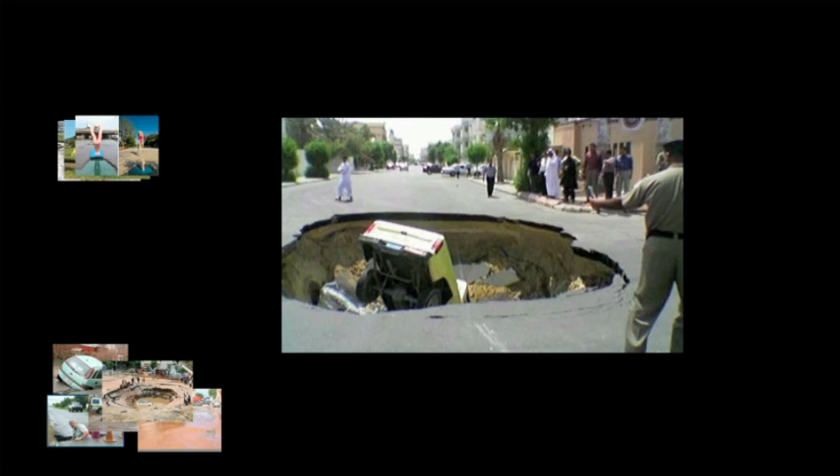I'm an engineer and geologist by profession. I've been at CSIR for 36 odd years, doing research full-time in various aspects of roads, specializing for quite a long time in unsealed or gravel roads. This moves on to low-volume paved roads and then ordinary paved roads. My interest in potholes really started with gravel roads, because once they form, it's very difficult to get out. It just carried on as I moved into paved roads. I did a PhD through the University of Pretoria on gravel road materials and performance.

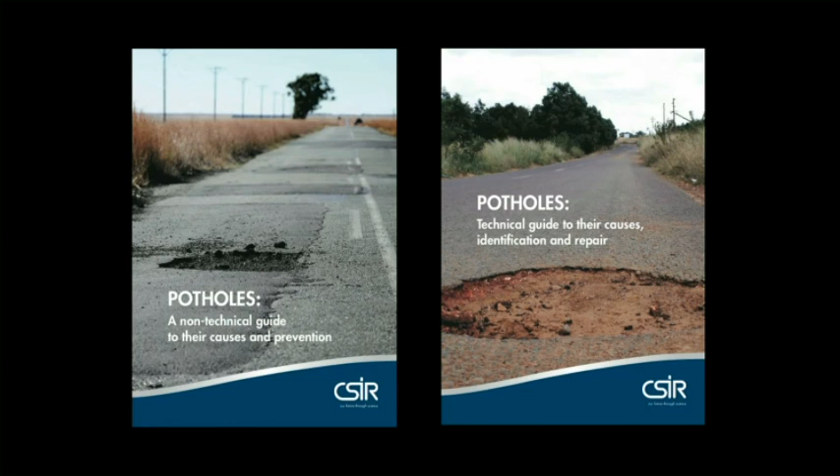Our CEO or president of CSIR turns up in Parliament a couple of times a year, and in the early stages, end of 2009, early 2010, each time he went to Parliament, everybody said, what is the CSIR doing about potholes? Essentially, we don't fix potholes, that's not our job. We do research and some initial training and then hand it over to people like the South African Road Federation to carry on the training. But the message came back that this was a worry to government, and so we decided to do this project to put together the information we gained over the years into a document which would hopefully help reduce the pothole problem.

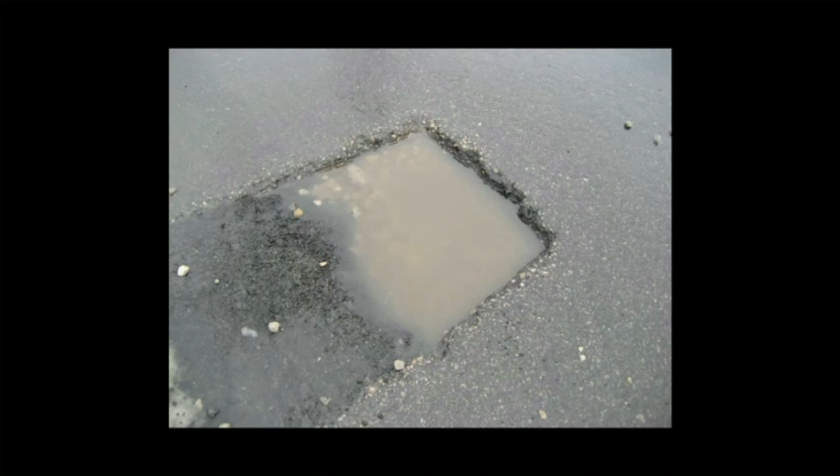I think it was a pretty wet summer season we had up here in the Highveld. And as we'll probably talk about shortly, water and roads don't combine under traffic. So with the excessive rainfall, fairly extended periods of fairly heavy rainfall, the roads started deteriorating. Potholes increased far more than in previous years, and basically the repairs couldn't keep up with them. So they became this visible, high-profile problem countrywide.

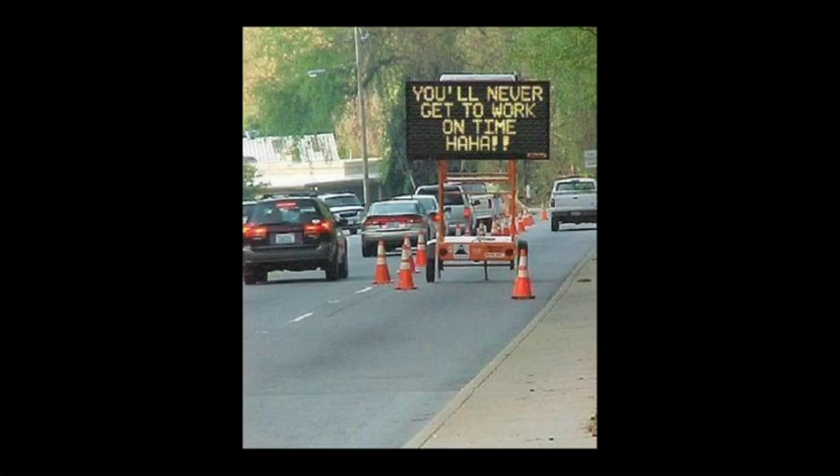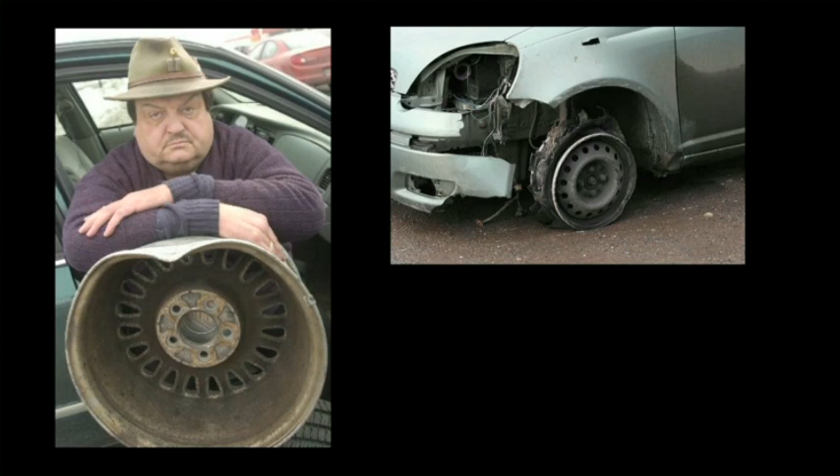Up until 2009, there had been a couple of fairly high-profile claims against road authorities for potholes, damage to vehicles, accidents on bicycles, for instance, things like that. But it was a fairly lengthy court procedure to go through. I think in 2009, 2010, where the damage was more tires, rims, some minor vehicle damage, people realized they could claim from municipalities and road authorities, and the claims started coming in. But apparently the authorities were suddenly saddled with all these claims, and they admitted responsibility in many cases and didn't even argue, paid up.

Not at all. We've seen in literature that the UK, Australia, over the last couple of years have also experienced extensive development of potholes, and in monetary terms far more than we actually need to put in to repair them. So it's not unique, but it's a legacy of cutting back in funding over the years in terms of preventative maintenance. If you Google potholes, you get quite a few million hits immediately, but they tend to be predominantly from America and Europe. And the origin or cause of potholes in those environments is somewhat different to ours.

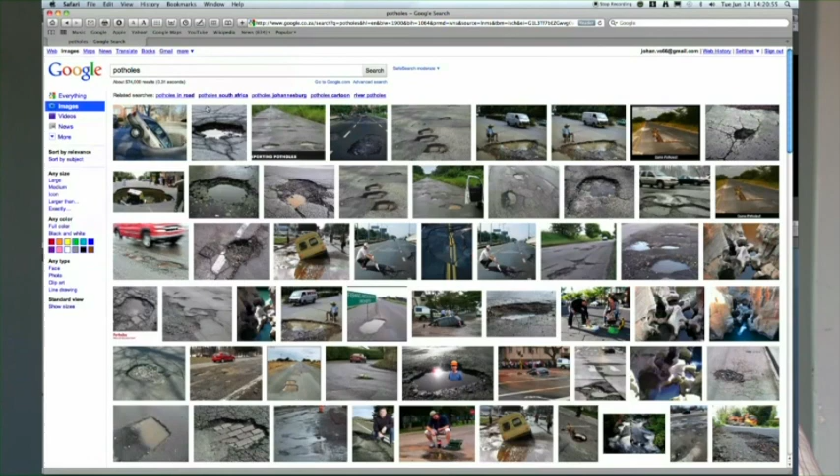There, where you have the so-called spring thaw at the end of winter, when the frozen water in the road starts thawing out, it affects the road, softens the material, weakens it, and heavy loads on that type of material lead to potholes. That's not the kind of pothole we get in South Africa. The whole road network, right from the early 40s, 50s when they started paving it, uses much thinner asphalt and thin chip seals, or spray seals as they're called. In Europe, it's not uncommon to have 100, 150 millimeters of asphalt surfacing on a road. Here, the maximum would typically be about 50, often 25 to 40. So our pavement structure is very different, primarily because of the drier, warmer environment. We haven't got the cold conditions in winter.

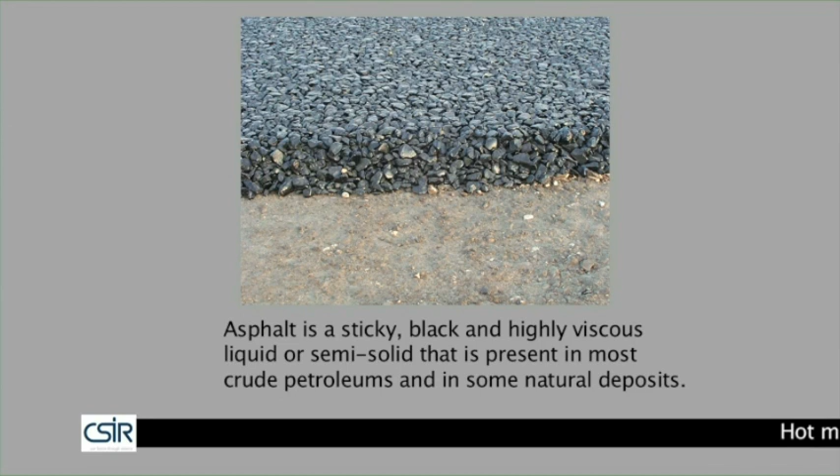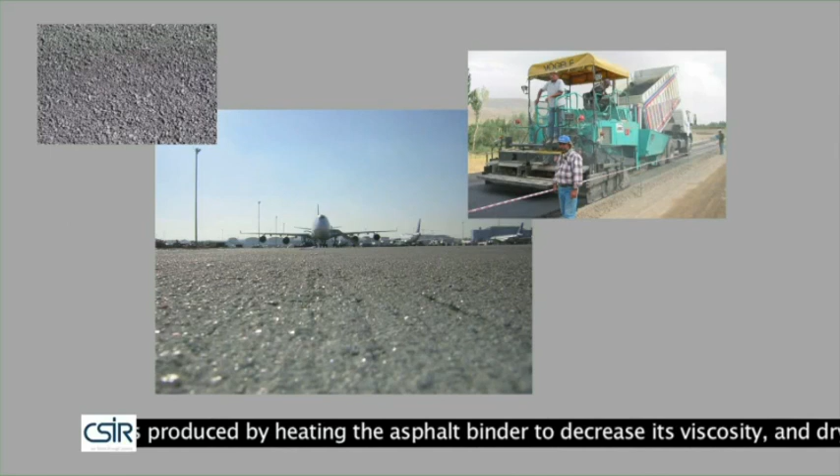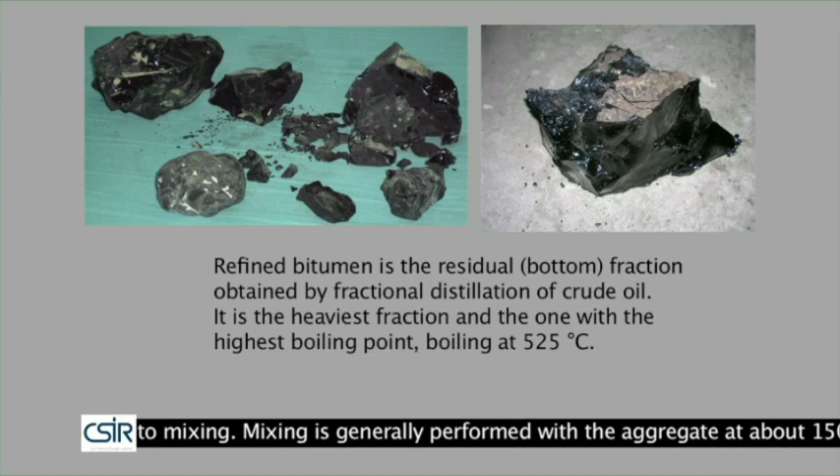Asphalt roads are roads that are paved with a mixture of stone and bitumen, and there can be two kinds. It can be asphalt, which is made in a hot mix plant at high temperatures, placed in the road at high temperatures, a combination of usually aggregate, sand, bitumen, and some cement or lime or something. The other kind of paved road we get is the thin bituminous surfacing, where you spray a layer of bitumen on the road, put stone on that, roll it in, and that's basically it. Sometimes you can have two different size stones to make the seal.

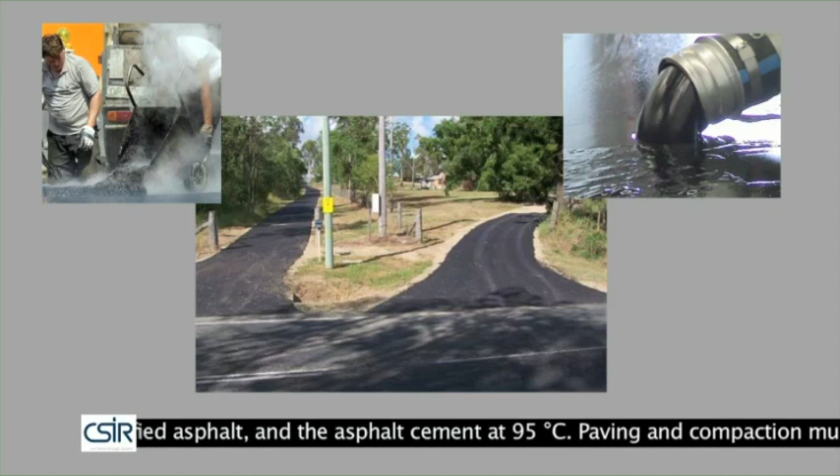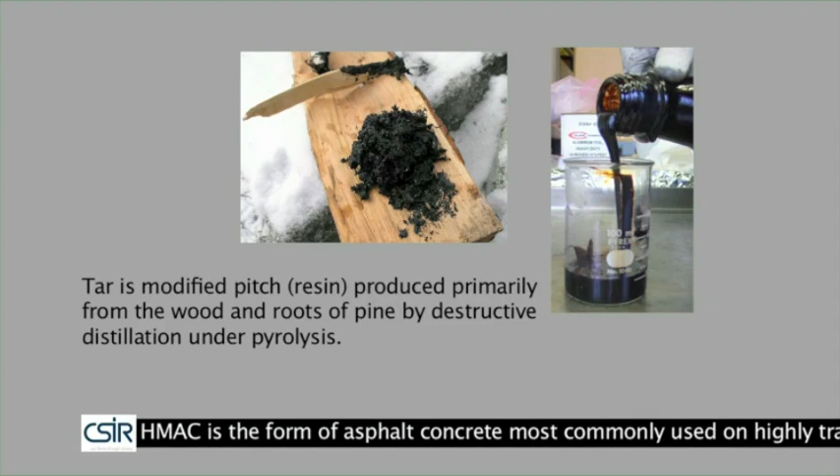Tar we don't use anymore, it's basically banned for use on roads in South Africa. It is carcinogenic, it's derived from coal, whereas bitumen is derived from oil. That's the main difference. And then concrete roads - in South Africa we've probably got maybe 4 or 5% maximum of concrete roads, and a totally different process, which is cement, aggregate, and sand mixed together.

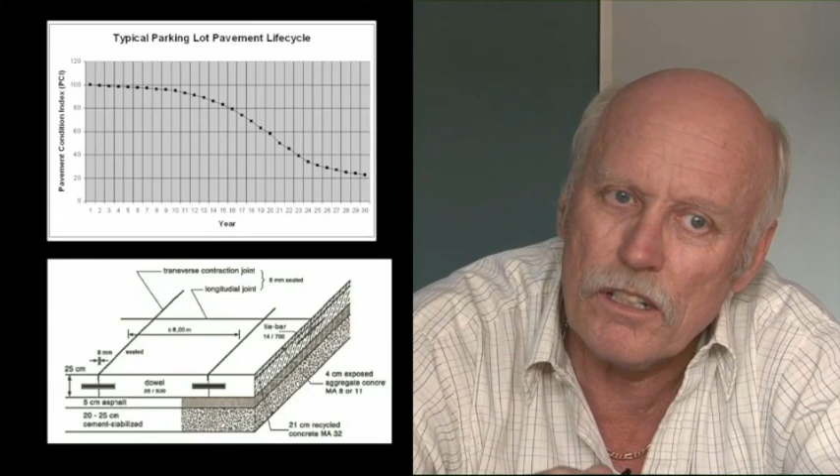A good asphalt road is designed to last probably 12 or 15 years with minimal maintenance. If the pavement layers are correctly selected, the materials, the pavement balance is right, the asphalt is right, and everything's constructed properly, they should last at least 12 to 15 years without any maintenance.

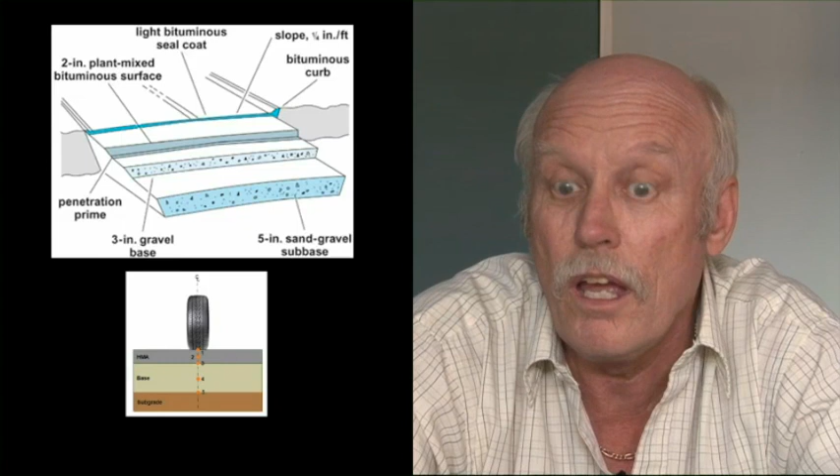If they're not maintained, the asphalt starts drying out and shrinking. It goes from the darker blackish color to gray, and it becomes stiffer as the bitumen volatiles evaporate. It gets stiffer, which allows it to deflect more under traffic, and it generates fatigue cracking just from this repeated bending up and down under traffic. That's the cause of cracking in an asphalt road, which ultimately leads to potholes when water gets into the cracks.

There's a whole lot of different ways that cracking forms in asphalt. Obviously, one is if you've got poor drainage. Next to the road you get ponding of water. It could be from irrigation, seepage from a stream or dam, or even often in informal settlements, just the general drainage ends up seeping into areas next to the road.

If that water lies there, it can soak into the road, the structural layers beneath the asphalt, and weaken those layers, so your deflection under traffic is even higher, and the fatigue cracking is quicker. It's really like bending a wire backwards and forwards — your bent wire gets hotter and hotter, and eventually it'll break. That's what happens to a road.

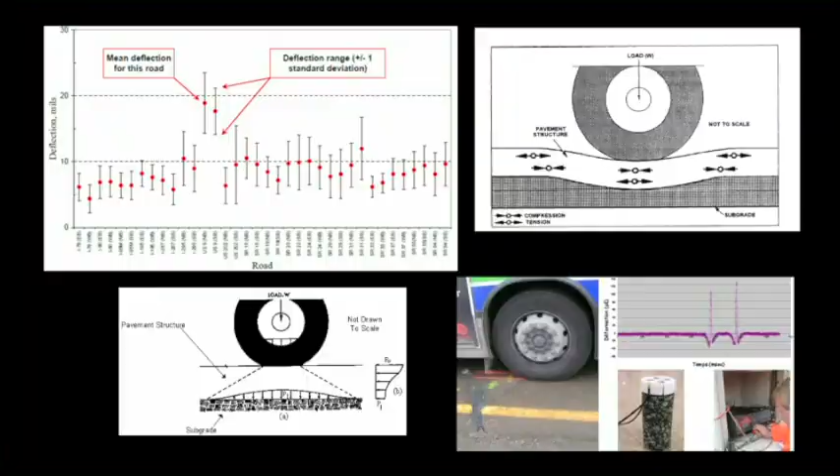Under every vehicle there's some kind of vertical movement. A really good strong road may deflect 0.2 or 0.3 millimeters. Other roads may be 0.8, 1 millimeter. We've measured even 2.5 millimeters in some very light pavement structures. Obviously, as a vehicle goes across, the effect of that movement on the bitumen or the asphalt is exactly like the effect on a wire, and ultimately it will crack.

Aging affects bitumen, as I mentioned earlier. The bitumen is placed hot — it's refined and made at the factory, delivered to site at anything 130 degrees upwards, sprayed on the road, and it cools down. Immediately it starts oxidizing just from the oxygen in the air and the ultraviolet light. It starts aging, losing the volatiles which keep it flexible — a lot of the chemical compounds actually evaporate with time. This causes stiffening of the bitumen, whether in a thin bituminous seal or an asphalt, which makes it more prone to fatigue.

When we don't have particularly good materials for the pavement structure, it's not uncommon to get a material that you can improve by the addition of cement or lime — that's what we call stabilization. You can make a weak material almost into a weak concrete, which is much stronger than we need in a road in many cases. When we add the stabilizer, be it lime or cement or a whole lot of other things, it absorbs water from the layer to hydrate it and causes formation of cementitious products, which causes shrinkage of the layer, which causes cracking. Frequently driving on a road, you'll see this typical block cracking.

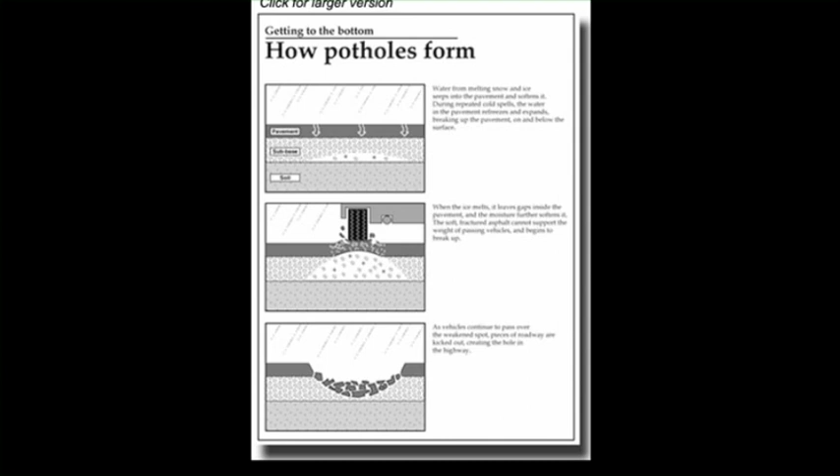If those cracks aren't sealed, the water can get in. What we do know is that those cracks, even in the subbase, which is one of the support layers — above the subbase you'll have a base course, which could be a G1 very good stone base, and then your surfacing — those cracks can actually reflect right through the G1 and through the asphalt or any other surfacing and appear at the surface. That's when they need to be sealed with a special bitumen rubber or something to stop water getting in. If water gets in, it runs through the crack, through the base, through the subbase into the subgrade, and you're back with a weak support layer.

This is a big problem: traffic. Over the years, from 10, 15, 20 years ago, we had sort of 2 or 3-axle trucks. Now we've got literally hundreds of these 7-axle interlink trucks. The ones travelling on the main roads, the weight is controlled pretty well, so they tend not to be overloaded. But the ones on the back roads and less important roads, where there's no overloading control, tend to be overloaded, and the effect of an overloaded axle is extremely detrimental to roads.

The damage is a little formula: the weight of the axle over 80 kilonewtons, which is our standard legal axle load limit, to the power 4.2. So any overload is increased to the power 4.2, which has an enormous effect on the way the road handles that load.

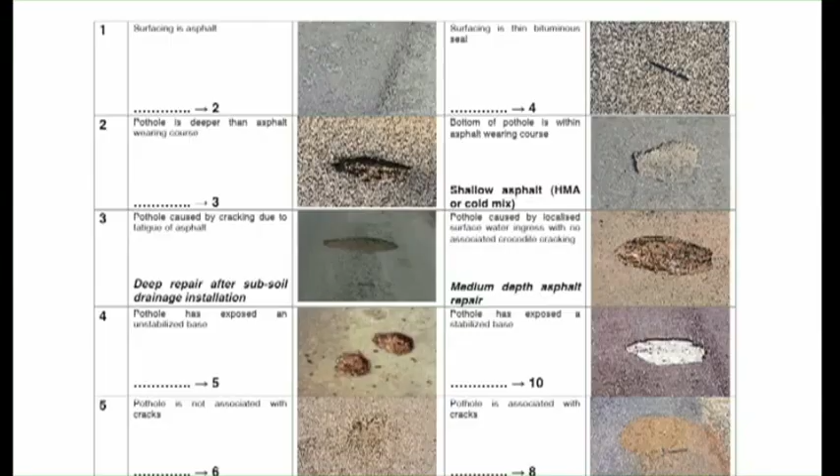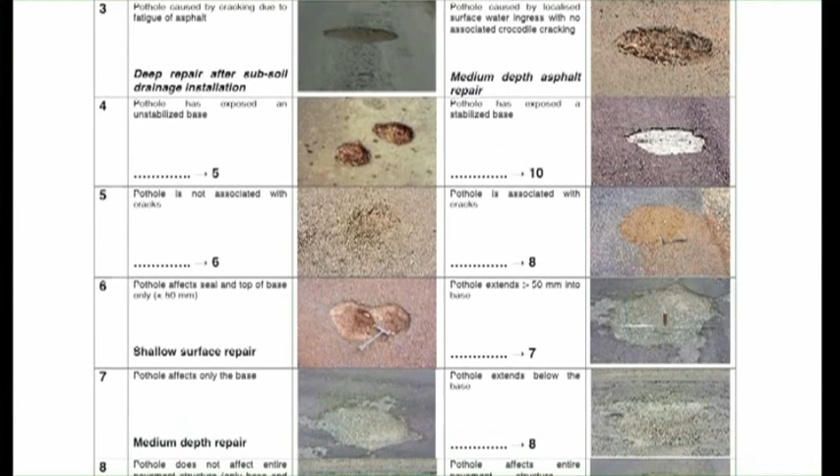When we were doing this document, we noticed there were different kinds of potholes in asphalt and thin bituminous surfacings. The thin bituminous surfacings in South Africa probably make up 95% of the bitumen paved road network. Apart from the main metropolitan areas and the national highways, the N1s, and even not all of the N1, but most of it, those are paved with asphalt.

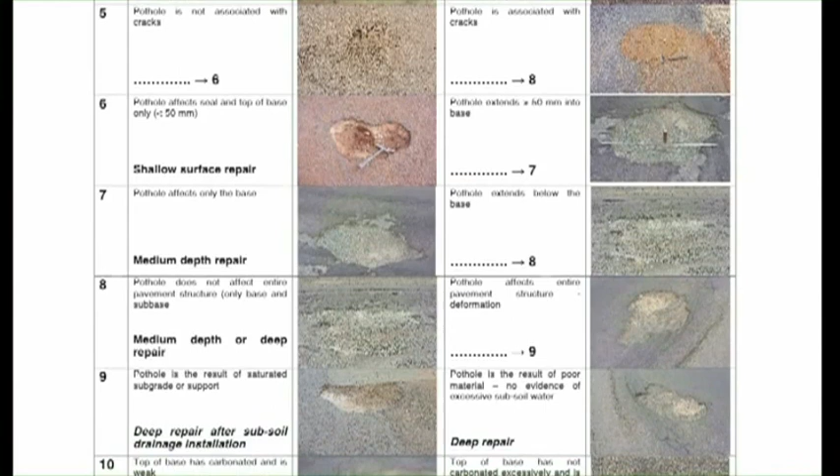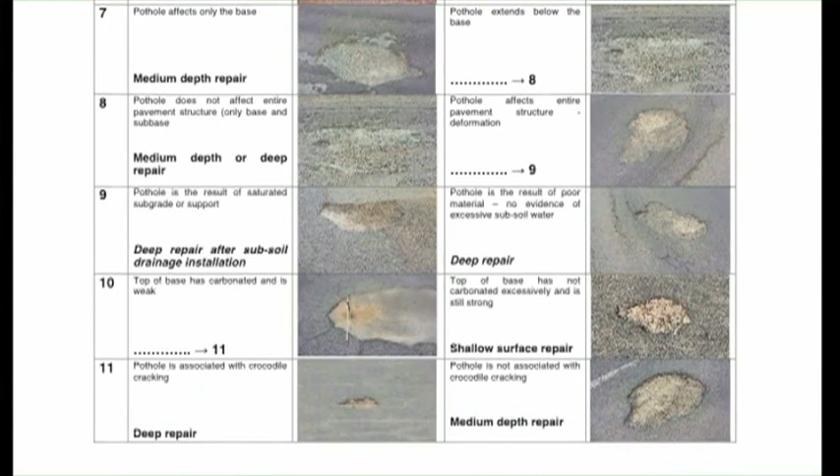Everything else in this country is paved with what we call thin bituminous surfacing. And these vary from 5 millimeters, for a sand seal, up to probably 17, 20 millimeters for a double chip seal with a slurry on top or something like that. So they do differ in the way they fail and perform from an asphalt.

A typical thin seal, a single seal, should last 7 or 8 years before it needs some kind of maintenance. A double cape seal, which is a seal plus a slurry seal, should last 10, 12 years, compared to an asphalt, which is probably looking at 12 or 15 years. So they need more maintenance.

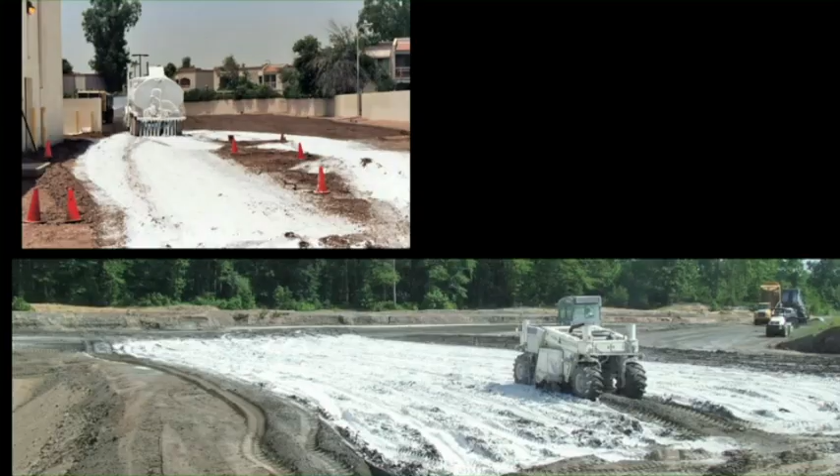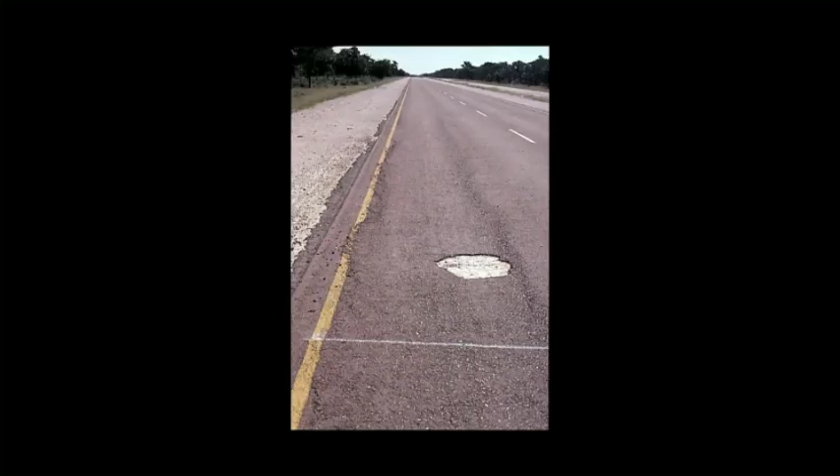As mentioned, often the top of a stabilized layer becomes weak. Essentially, cement or lime, which you use for stabilization, are made by burning limestone, which is calcium carbonate, generating carbon dioxide, and you're left with a calcium oxide or hydroxide, which is a stabilizing material. That is naturally unstable at the current ambient environmental conditions and wants to absorb the carbon dioxide back into it and go back to the limestone.

So during construction, one has to be very careful that this process doesn't take place too quickly. And what we do find in many cases is that the top layer does carbonate, and so you get this weak laminated layer on top.

Again, there are ways of overcoming it through the construction process. It can be skimmed off with a grader before sealing, that type of thing. So there are ways of handling it. It's not a major problem, but if it's not seen in time and handled, you can get this lamination or thin layer beneath the seal, which is prone to crushing under wheel loads. Even the sealing process alone, just rolling the chip into the top of the base, can break it up. So it can be a problem, and it will lead to potholes.

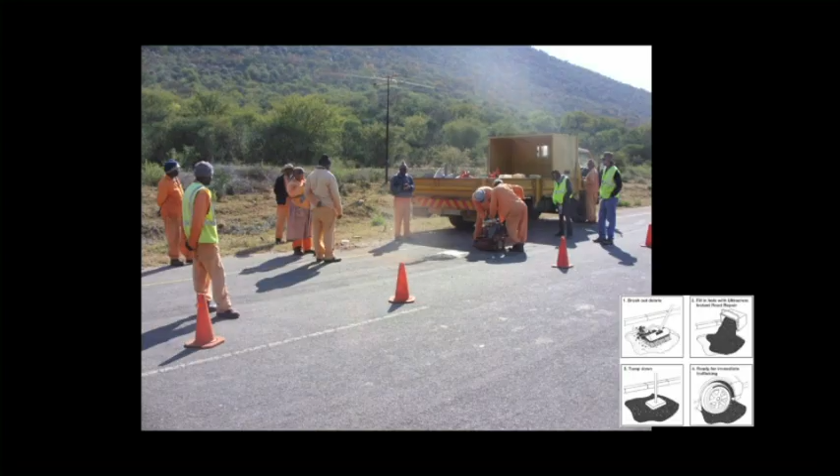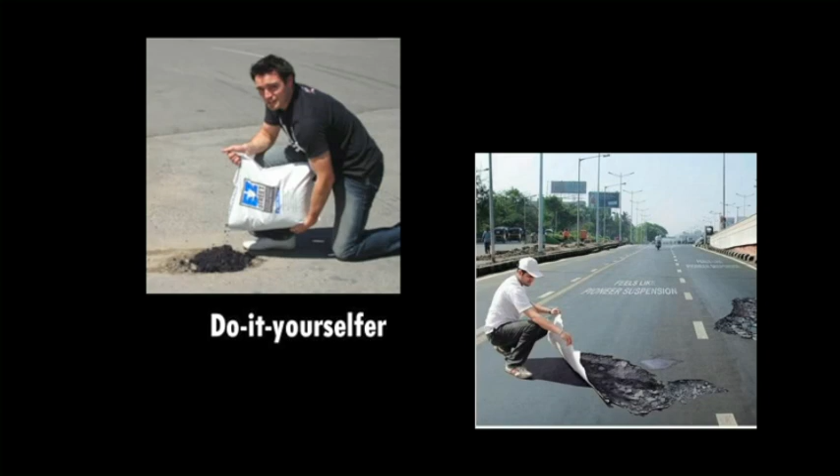This is one of our biggest problems, where potholes are seen, teams go out and patch them, but they're not actually treating the cause. All they're doing is superficially fixing the pothole. If the cause is not attacked and solved, then the problem is going to form again. And this is probably the biggest thing that worries the communities and the public, as they see the pothole repair teams over and over at the same potholes, patching them over and over again.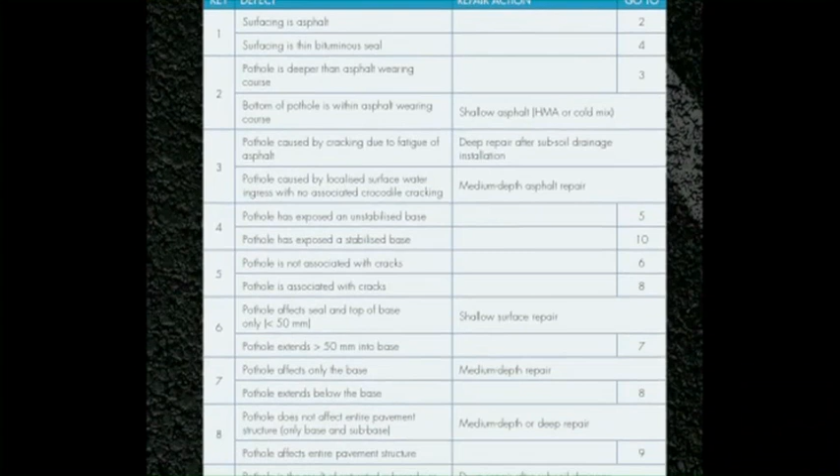One of the main objectives of this guideline is to identify the causes so that when the pothole is repaired, it's repaired properly and we don't have to keep going back over and over. It costs a lot of money, takes a lot of resources, wastes a lot of materials. A lot of potholes are not done properly, they won't last.

But there are other areas as well. It's not just these. Obviously, if there's water as the problem, you need to stop that water. And that often entails the installation of subsurface drains to cut off the water before it gets into the road.

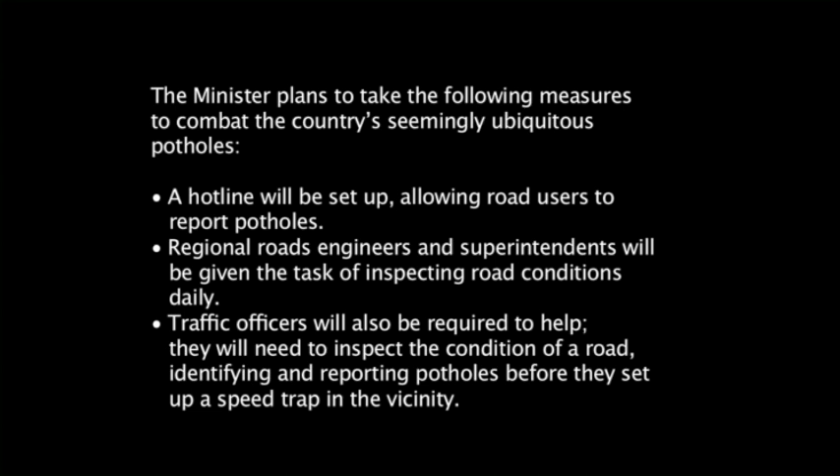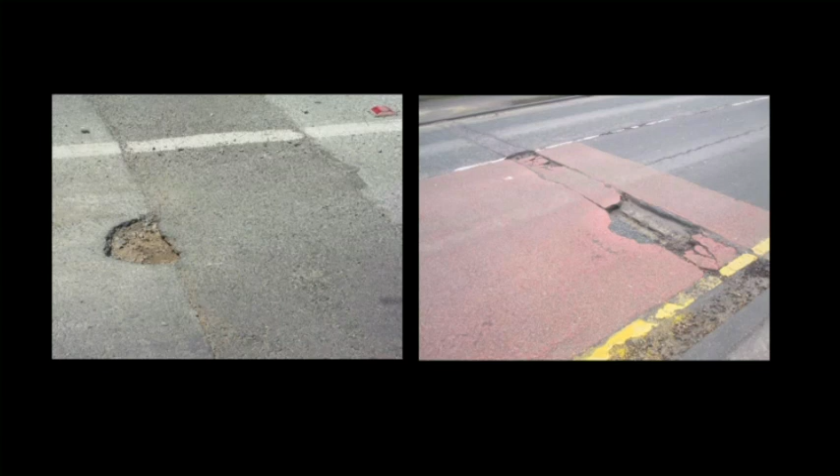We get other areas where trench reinstatements, municipal roads particularly, where a service provider will dig a trench across the road to put in pipes or wires or whatever. They're not normally backfilled and constructed to the same standard as the road, so you get some depression, the trench collapses a little bit, water ponds in that, soaks in, softens the road, and the trench fails. You frequently see potholes along the side of trenches where the join between the trench and the old road is not sealed properly, and water goes in there.

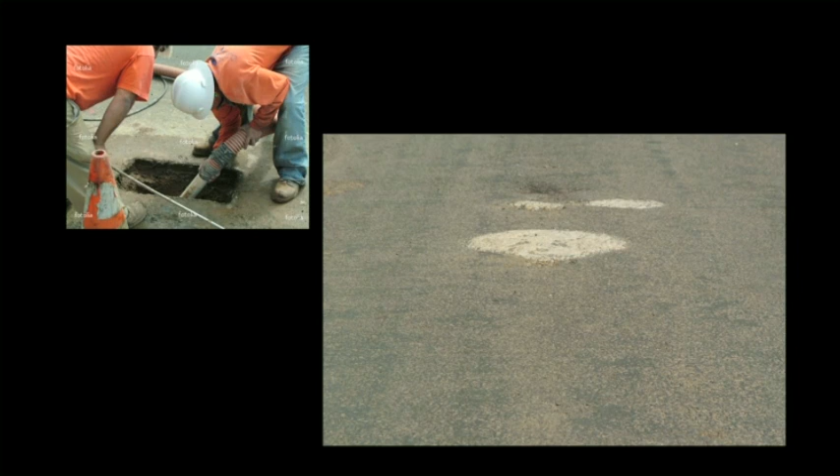So there are all these areas. Another big problem is people putting in a heavily stabilized material, almost a concrete, just by mixing some soil or aggregate with cement, far too much. We shouldn't use more than about 3%. You end up with essentially a concrete block in the road. This is going to behave differently under traffic. It's going to rock, it's not going to deflect to the same extent as the traffic, so there's going to be movement at the edges. When it starts opening, cracking around this block, water gets in and problems start again.

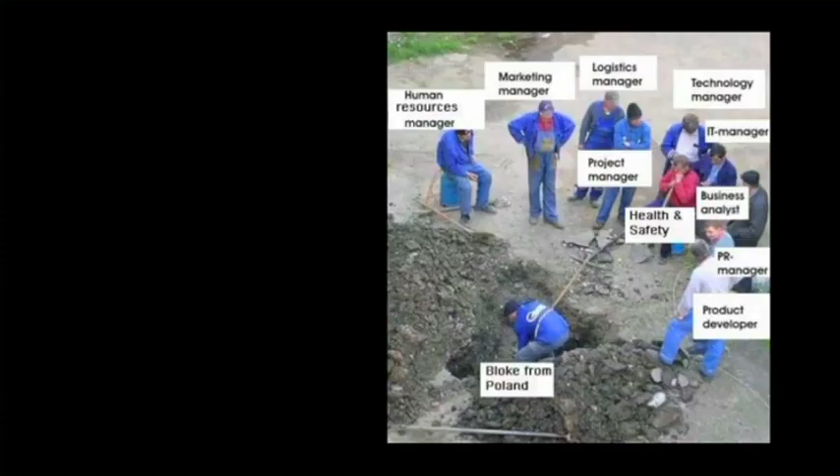So there are a whole lot of areas of repair that, if not carefully controlled, will just lead to bigger problems. The Department of Public Works is trying to increase the number of labourers on pothole repair jobs to create jobs. It's a massive opportunity to create lots of jobs.

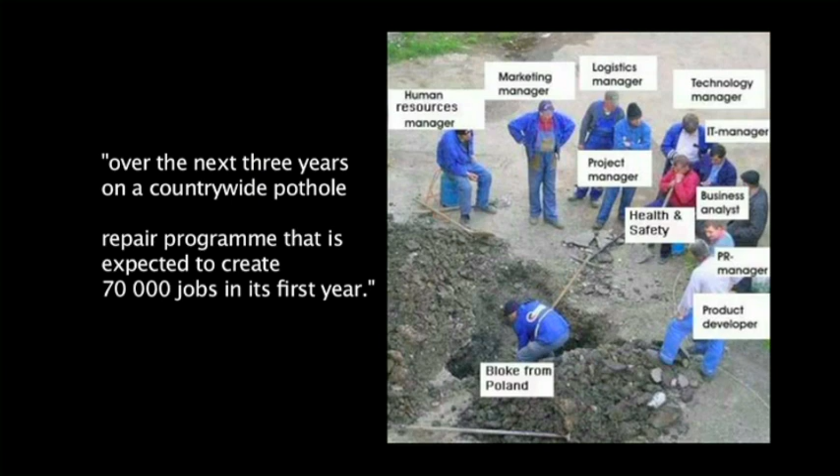They're looking this year at creating something like 70,000 jobs. A typical pothole repair team would be anything from 10 to 15 people doing different parts of it, compacting, digging, putting in the asphalt, whatever. There are a number of mechanical devices, machines, whatever you want to call them, that go around with 2, maybe 3 people and literally repair a pothole on site. It does not create a lot of jobs, but it's quick.

You can probably repair a lot more potholes in the same time, but it does not necessarily solve the underlying problem. You're just filling in a hole. It's like putting a plaster over a problem. You're not curing the septic wound underneath it.

Right, there are a few basic rules. In the guideline document we've highlighted, there's a chapter on repair of potholes, and depending on the cause, there'll be different kinds of repair. The preliminary treatment is really the same for all of them: you identify the pothole and mark out the area to be fixed. It should not just be the pothole, because water has weakened the area around it, and there's probably cracking associated with it. So it needs to be much bigger than the pothole, and it needs to be marked out.

Then one comes on site, you open it up, clean it, cut it out - typically we're recommending a diamond saw, but teams can do equally good jobs with picks. Sometimes you need jackhammers if it's a stabilized layer. You need to clean it out, get all the loose material out, get to where you've got the original unaffected road pavement, and then start doing the repair. So the preliminary work is actually probably the most important part of it.

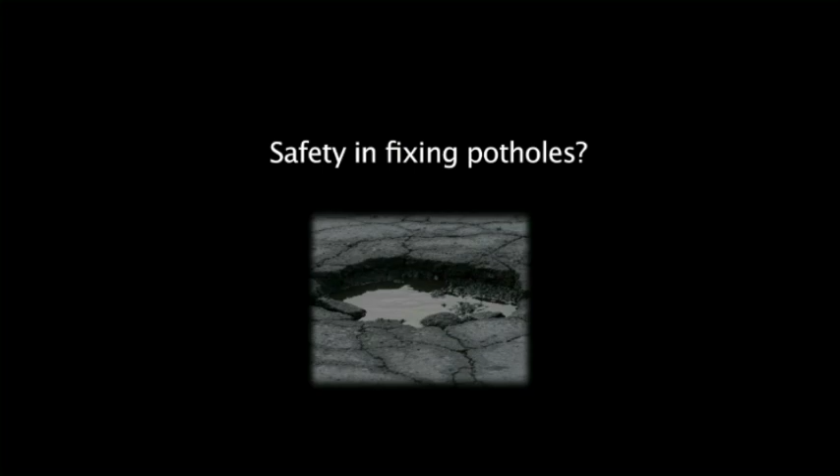Any road project obviously has serious safety implications - people working on the road, fast cars, big trucks. We've, in the document again, highlighted some aspects. It's not really a safety document; there's lots of other documents on that, standard procedures.

But there are things we've seen on a lot of pothole sites where the cones are so black from bitumen and stuff you can hardly see them, and the safety jackets are dirty and don't show up properly. So we're highlighting a few basic things, like your flagman should be properly trained, the signboards should be clean, and the right boards - you often see the wrong boards. Basically we're just highlighting a couple of things, but that aspect would normally be under pretty good control of the contractor anyway.

Typically the pothole would be filled with different layers, and then the top layer would be a cold mix or hot mix asphalt. We can talk about that shortly.

It's not unusual for potholes up to 100, 200 millimeters deep even, to clean them out and just fill them with hot mix asphalt, but it's expensive. It's far more cost effective to actually put a layer of gravel or stabilized layer or treated material in first and just use the asphalt for the top 50 to 75 millimeters.

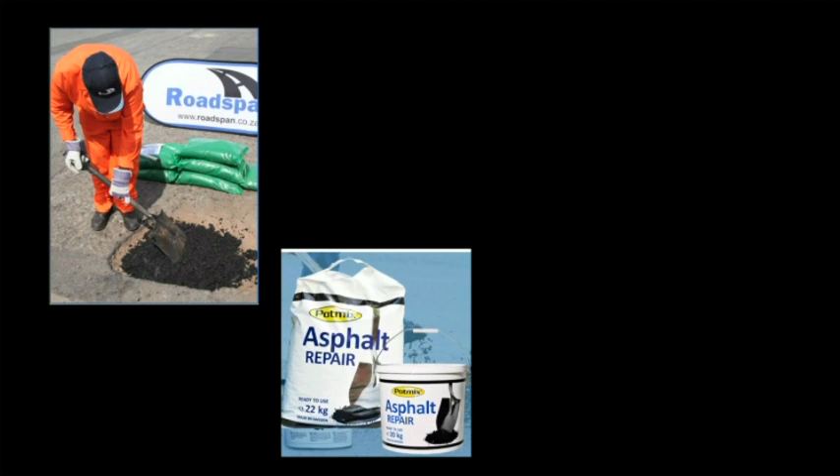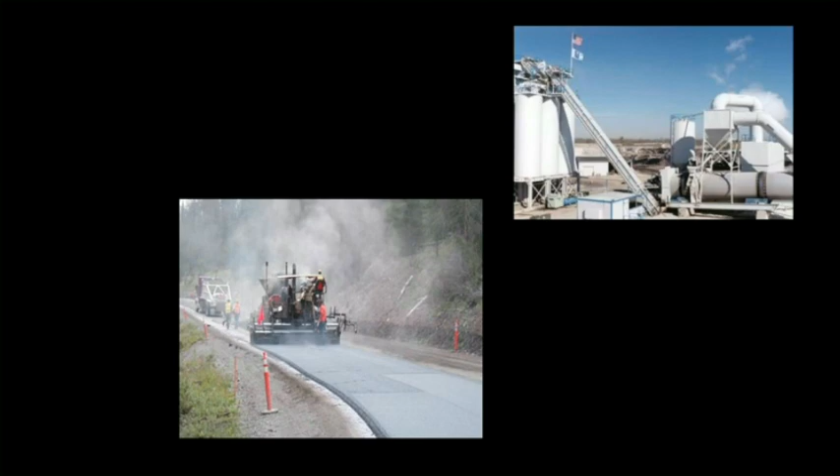We get two kinds of asphalt - a cold mix, which comes in bags, which you can use particularly well in rural areas. In urban areas, if you've got a hot mix plant, then it's probably more cost effective. A lot of the metros have their own plants, they can make it. The disadvantage is it's delivered in quite big quantities, and it has to be constructed, put in the hole, compacted before the temperature drops below - depending on the mix - but around about 135 degrees normally.

After that, it's difficult to compact. You don't get the density, it remains permeable. So in urban areas, they tend to look at hot mix asphalt. In rural areas, there's no way you can actually deliver a truck of half a cubic meter to one pothole somewhere, so cold mix is much better. It comes in bags - open the bag, put in a hole and just compact it.

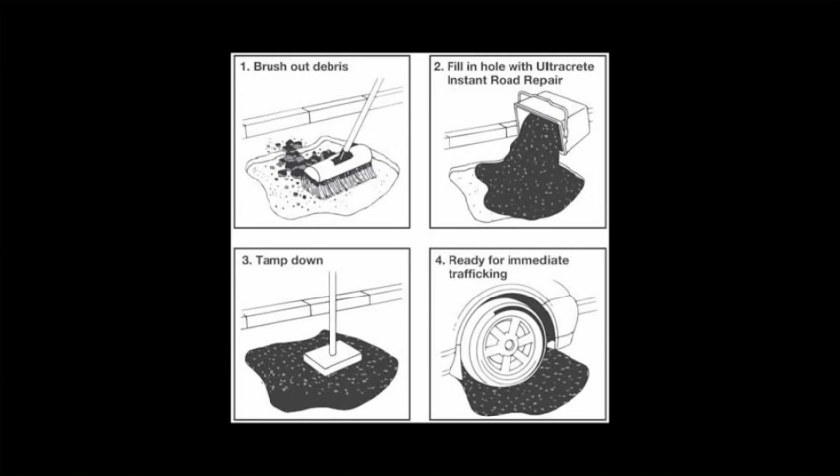The worst thing you can do, and we see this commonly, is to fill a pothole with material from the side of the road. It's often done as a temporary measure until they come and repair the pothole properly. But this usually happens when a pothole gets to a significant depth - otherwise, don't worry to patch it. Once vehicles start feeling it, probably 100 to 150 millimeters deep, people will take material from the side of the road and put it in the pothole.

The problem comes when it's time to actually patch it properly - that material is not always removed. So now it's cleaned out up to a point, leveled off, and they put cold mix or something on top of it. But you've still got this really bad, poor, moisture-sensitive material underneath it. So it's not a good idea to use these sort of typical materials you find on the side of the road. They will lead to later problems.

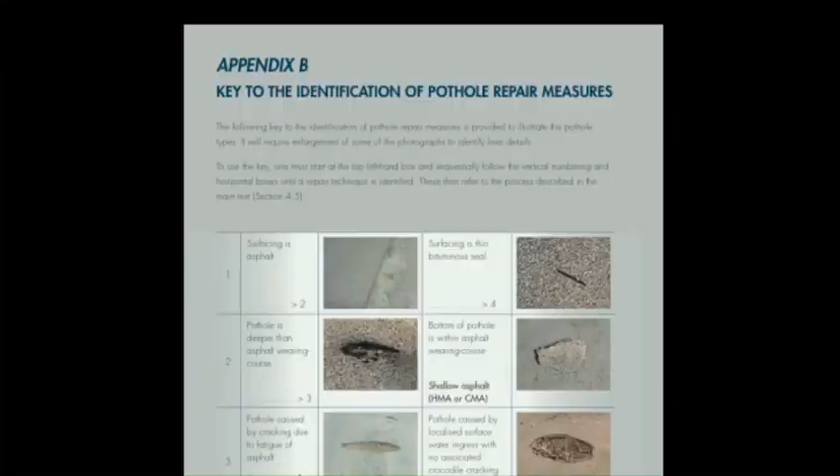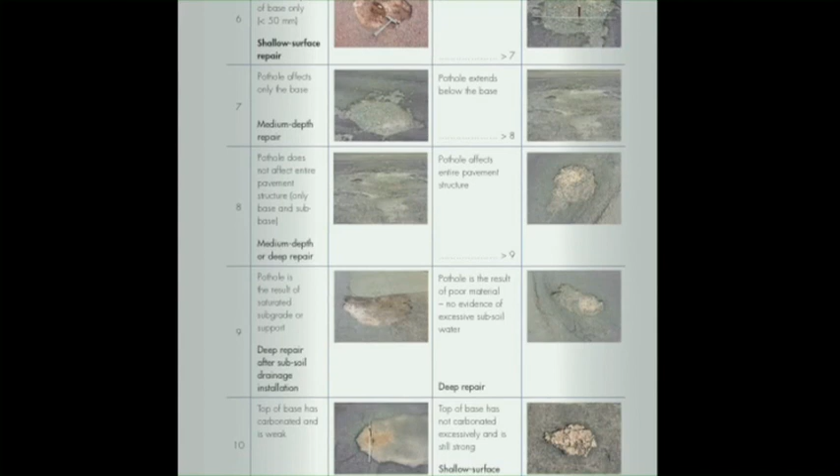The pothole guideline, when we're doing it, we identified that you need to relate the type of repair to the cause. In the guideline, there's a decision key process where one looks at a pothole and makes a number of decisions, usually a yes, no, or this or that. It's a choice of two, and you move through the key based on these two decisions each time.

There's 11 steps in the key, and at various points you'll get either moved to the next step or there's a solution. That could be a shallow repair or deep repair, or asphalt with a deep repair with subsoil drains, for instance. So the document basically defines 6 major types of repair, and the deep ones could or could not have subsoil drainage with them. Subsoil drainage can be a problem because it's quite expensive, needs to be properly designed. You need an engineering input to design it to make sure it's effective.

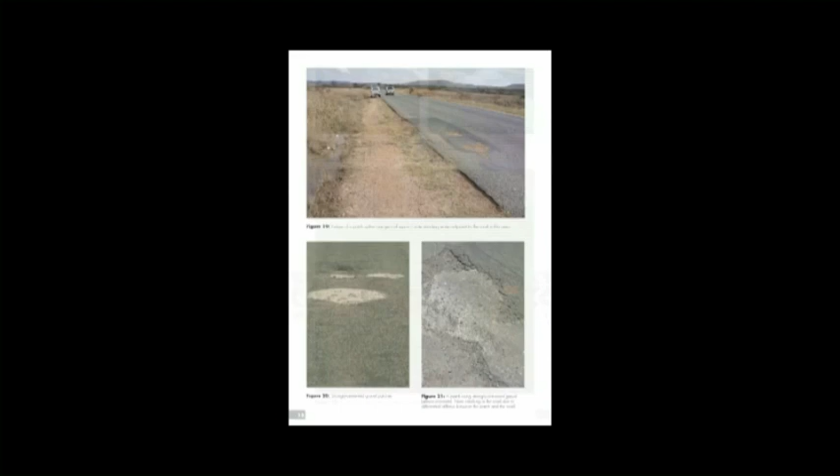So essentially the repair methods in the document for each of those, shallow, medium and deep asphalt, shallow, medium and deep thin surfacing, there's a laid out method in the document, a process to go through how deep you need to go down, what you need to do for each layer, and basically how to repair it.

The classification of the potholes in terms of the type of repair, training for that is being done through the courses we're running with South African Road Federation. They actually repair, and hands-on labour teams who will be repairing it. That training has been done through the Asphalt Academy, where they'll actually go out and do some manual pothole repairs. So there's 2 different aspects to the document: the one is the classification, the other one is the repair.

In the document, we go through a fairly rigorous quality control procedure, and it covers a number of things. Firstly, your materials that you use, they need to comply with specifications. So whoever's doing the repair needs to have stockpiles, stores of quality, of material of known quality that they can deliver to site fairly quickly as soon as the pothole is noticed, and repair it properly.

It's no good just putting the material in the road. It's got to be compacted to similar density as everything around it, essentially. So again, there are fairly simple ways of checking that the density has been achieved, and we've highlighted these in the document as well.

I mentioned earlier the asphalt has to be compacted at a hot temperature. If it's too cold, it will not compact, you will not get density. So again, it's another simple quality procedure. You just get a simple thermometer, shove it in the asphalt before it goes in the hole and check that the temperature is adequate. If it's not, that's got to be thrown away. You can't reheat it or anything. It's wasted.

Riding quality, you often see in roads that are fairly significantly patched, ups and downs and lumps and bumps, and the vehicles start moving up and down. This gives dynamic forces, dynamic loads on the road further down. So if the road is already fairly weak, that's why it's potholing, then it's going to generate more potholes further down the road. So we need to get as smooth a patch as possible so we don't generate this dynamic movement in the vehicles.

One of the things that's come out as well is the join between the patch and the old road or the existing road. A lot of the problems start there - that join opens up with time, and can be fairly quick, a few months even. Water gets in and the existing road starts failing rapidly. So you get a pothole at that join.

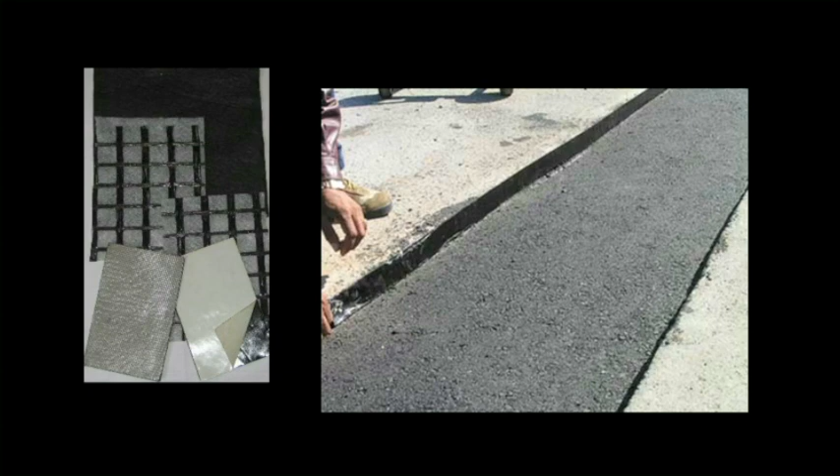The last thing probably discussed under the quality control here is the aesthetics. The job needs to look professional. We don't want lumps of black bitumen in a grey mess. It needs to be nice, square or round, although round is very difficult to make. We're suggesting square, rectangular or diamond-shaped patches in the document. They just look more professional and better engineered work.

Yeah, so that's essentially the quality control. Up to now, that hasn't been a major thing in pothole patching. But hopefully now, through the courses, people are saying that's what we need. We need to check that quality.

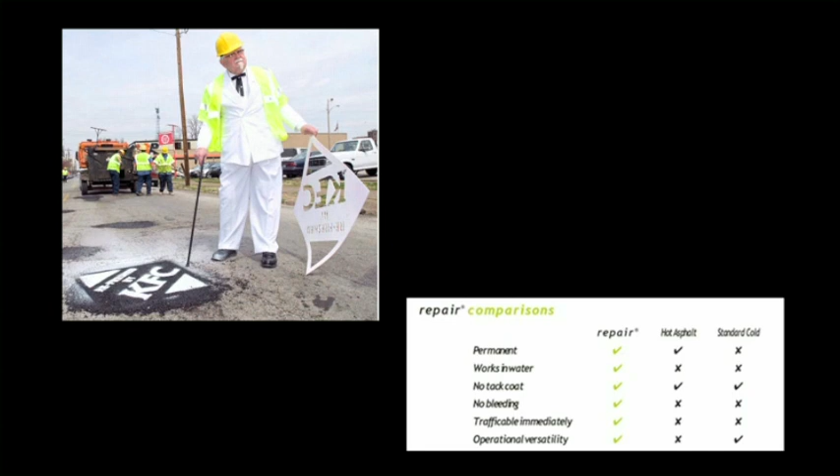One of the problems with quality as well is that it needs to be monitored at different stages. Compaction in a hole has to be monitored before the next layer comes in, whereas adhesion, for instance, of a geosynthetic strip to the surface, that probably takes 3 or 4 weeks to actually bond and stick down. So there's different times that different things need to be controlled, and that's one of the dilemmas now. Who controls compaction - the contractor, or do we have an engineer or inspector on site the whole time? This is one of the things that needs to be sorted out. We're trying to have a sort of standard record where the contractor will mark things.

One can go back later and check if he did try to pull the wool over everybody's eyes. But we're also saying the contractor should give some kind of product performance guarantee - that if he patches the hole, both the workmanship and the cold mix or hot mix needs to be guaranteed for a year or two, whatever they decide in the contract. That puts the onus on the contractor to make sure the job's done properly.

This is not a new thing. Over the years it's becoming more and more used. So it's not unusual, but this does make sure that the contractor - he may charge a little bit more initially, but you won't have to go back three or four times.

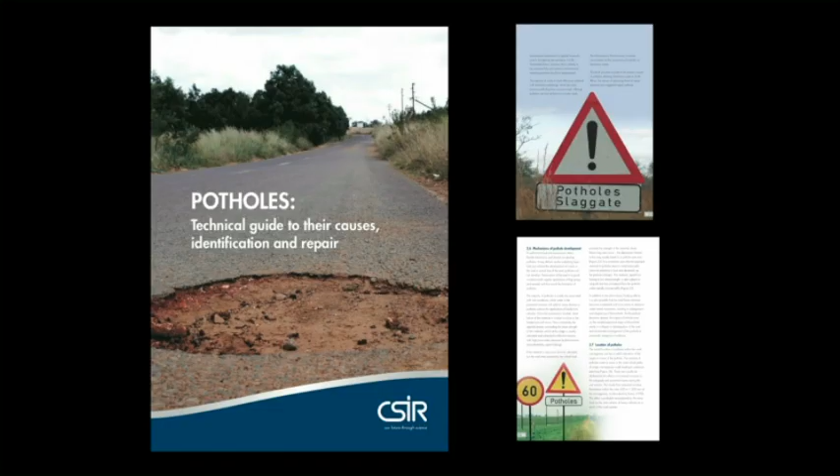What we're suggesting is the technical guide should be implemented by an engineer, or at least somebody with some engineering background - a qualified, experienced road inspector, something like that. That will make sure the cause and the type of pothole repair required is identified correctly. So that solves one of the problems. The engineer would normally specify that's the kind of repair, go out and do it.

Whether he will come back or somebody else will come back to check the quality - the engineer could do it, but that could be quite costly that way. Or somebody else could be appointed, specifically an independent assessor who goes out and checks quality. So there's different ways of doing this.

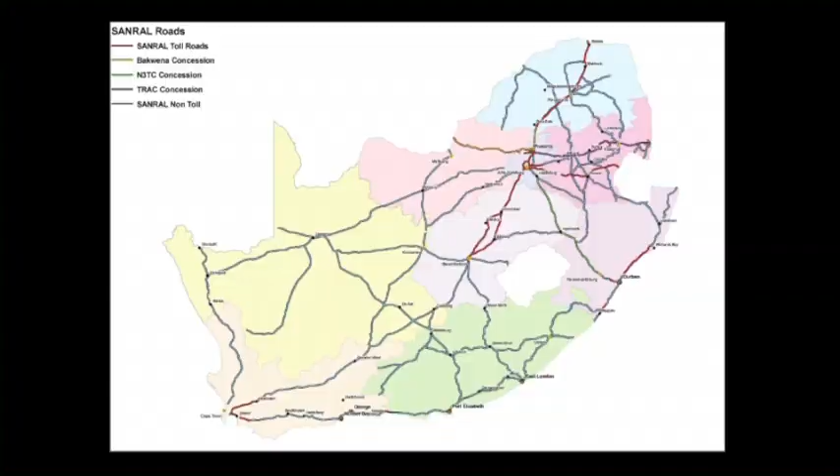It's interesting because if we look at the road network in South Africa, I think more than 80% of the road is long past its design life. A road is designed for 20 years - if you get 25 years you're probably doing well. There are roads 50, 60 years old that are still there. They're still structurally sound, but they're giving problems because they haven't been maintained, that's all.

The cracks have not been sealed. The length of road built in the last 10 years is probably minimal in terms of overall - 200,000 kilometers of paved road that we've got in South Africa. So our biggest challenge is this aging network. And we've seen the asset value of the paved road network is probably around 800 billion rand - that's what it costs to replace the paved roads now.

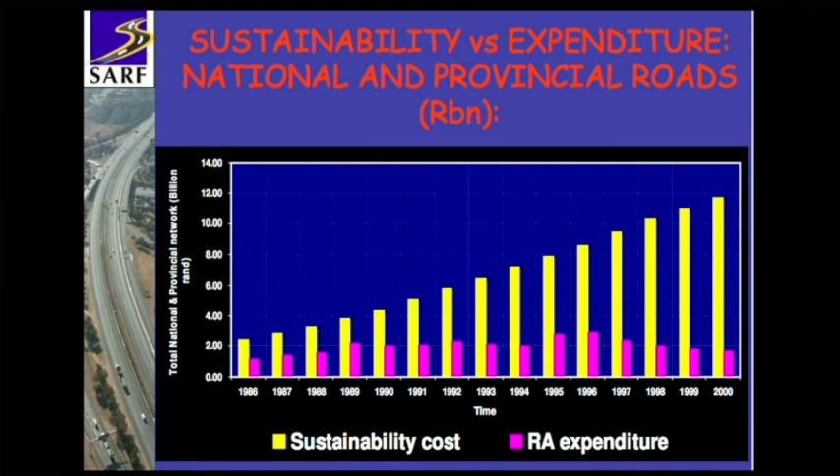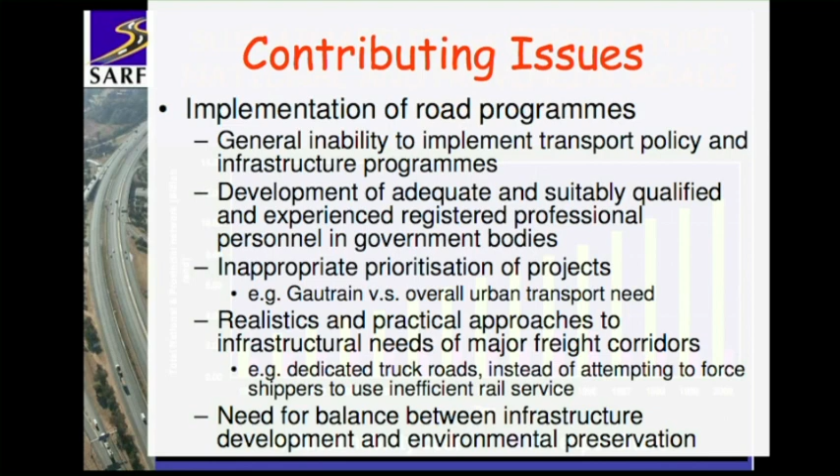We should be spending, if we say it needs maintenance every 7 years, probably 100 billion plus per year on maintenance. Currently I think we're spending around 30 billion. So we're falling behind.

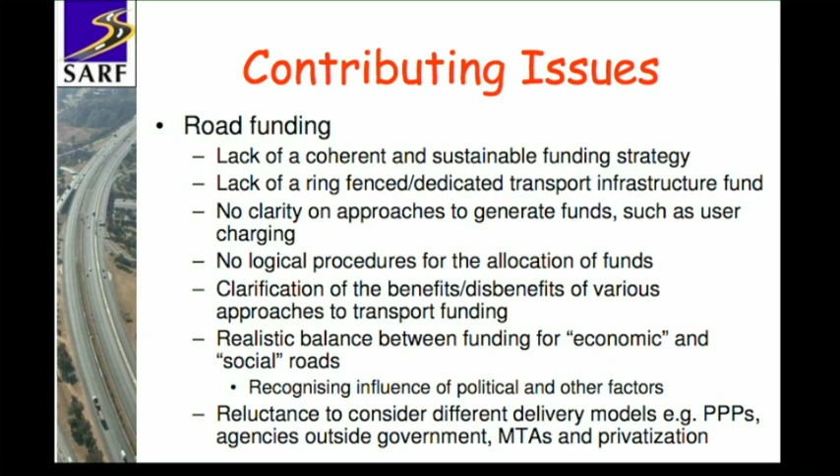And the more we fall behind - this is exactly what I said earlier about Australia and America - the problem with road maintenance is there's no immediate political benefit. The benefit is only shown 10 years' time when you've still got a road. But by then most politicians, managers and people have moved out of the system. It's not their problem anymore. These are the challenges one needs to overcome to spend money on something you're not going to see any benefit from.

Obviously budget's a big challenge. I think everybody recognises the problem now. I've actually been down to the Parliamentary Portfolio Committee on Transport together with the major road authorities, and the chairman of that Portfolio Committee was really interested in what we were saying in terms of budgets, amounts of money needed, and what's causing the problems. So I think at least now the politicians understand the problem - that's the main thing.

We probably need more than 100 billion a year just to keep up, let alone kill the backlog. Whether that'll ever materialise is another problem. It's got to come from somewhere, yeah.

Most university engineering courses have a transportation or road design module. It's fairly superficial - I think it gives basic understanding, but it's really the structural design of roads and rehabilitation. There's very little in terms of maintenance, hands-on things like pothole repair. There are courses - Road Federation runs a number of road maintenance courses.

This document has been seen by the university people now, and they're dishing it out as part of the course in a number of cases. So I think the awareness is there, but one of our biggest problems is the pavement engineers.

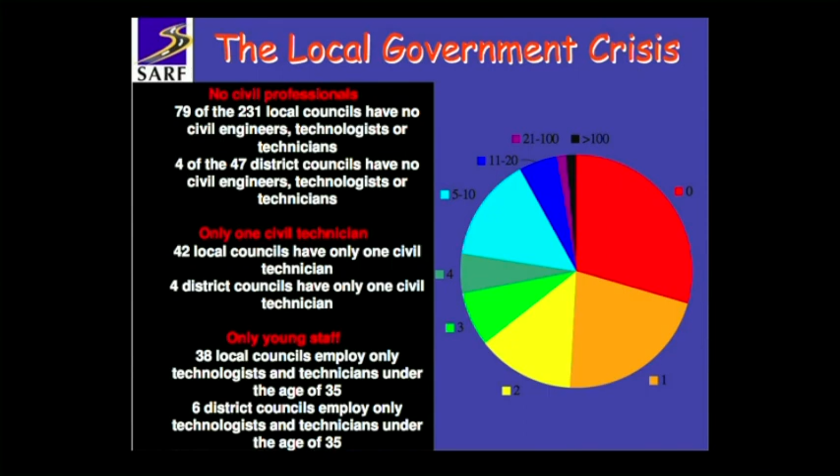We all know the skills gap currently in South Africa, where there's a pool of plus-50 white engineers, then there's a gap, and then a pool of probably minus-35, minus-30 black engineers. A lot of them are Technicon or university trained, so they just don't have the experience yet to do what the older generation is doing. That's our biggest challenge, transferring current skills down to the emerging engineers. Hopefully books like this document will help in that respect.

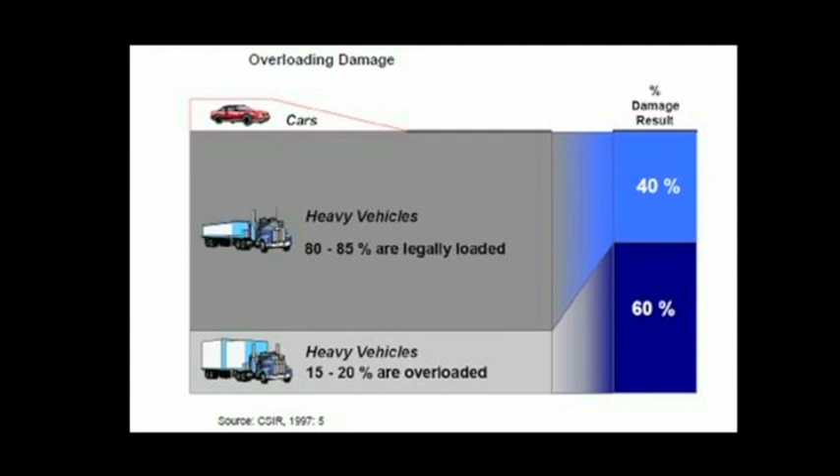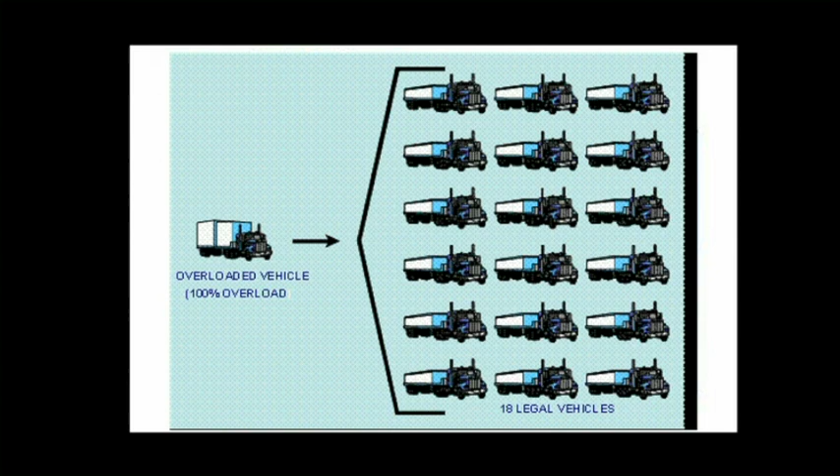Well, that's a sore point. Over the last 15 to 20 years there's been a proliferation of heavy vehicles, large trucks on our roads. Everybody sees it, everybody complains about it. In the morning traffic jams there's big 7-axle trucks stuck in the middle. The movement of freight from train to truck has increased exponentially. My personal opinion, and I think a lot of people agree, is that we need to get that freight back onto rail.

We need to upgrade the rail network, get as much freight as possible back onto rail, and keep the roads for light delivery and commuter traffic. We know you can never solve the congestion problem by making more roads or more lanes. It doesn't solve the congestion problem, it just attracts more traffic. So the only way is to try and get the slow-moving heavy vehicles off the road.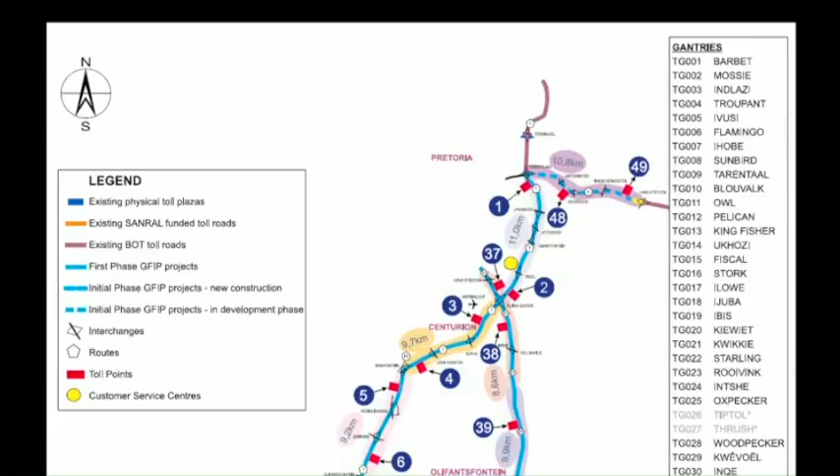Yeah, I think the GFIP, the Gauteng Freeway Improvement Program, is certainly going to alleviate some of the congestion problems on the highways. It's not going to alleviate the congestion problems getting off the highways, because those roads, once you get off, have not been upgraded in most cases. So the problems are going to be at the interchanges. But at least with 4 or 5 lanes, the traffic will move a bit quicker. So I think that's a good step.

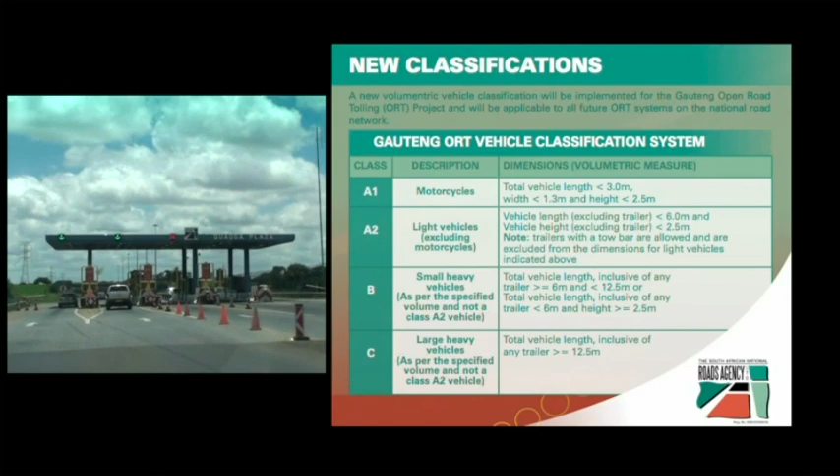In terms of the tolls, probably at first there'll be a bit of resistance, but when tolls first started in the late 70s in KwaZulu-Natal, people were taking all the back roads, but they soon learned it's actually much quicker and cheaper to go on the toll road.

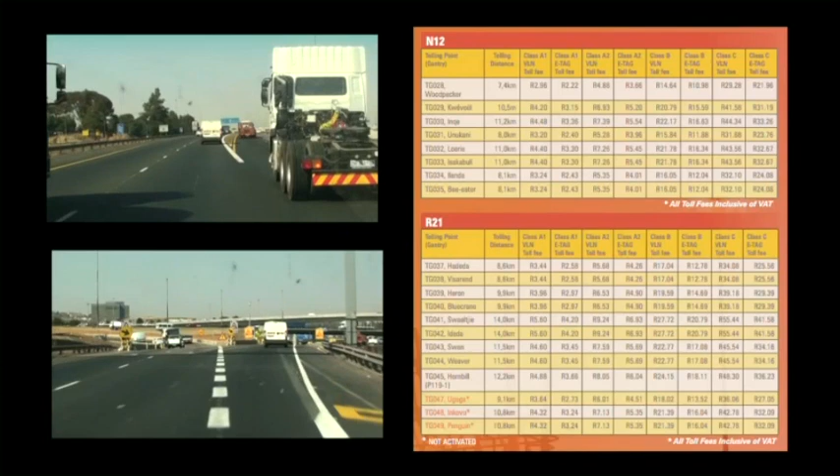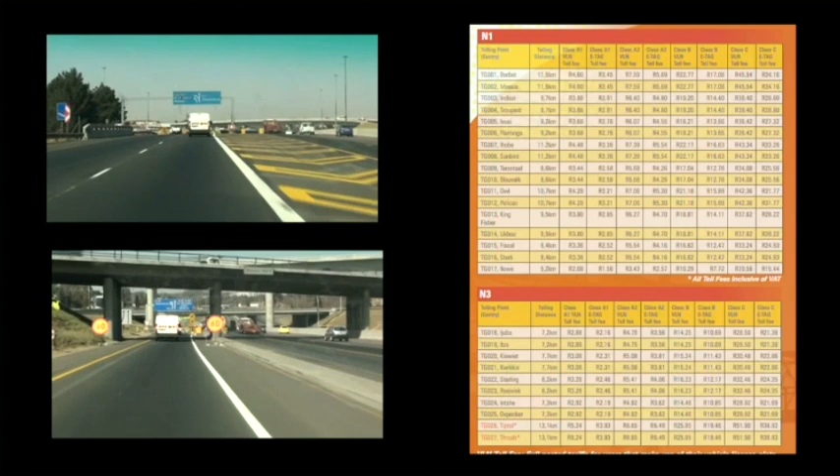The Gautrain certainly is going to alleviate a lot of the congestion in peak hour between Pretoria and Joburg. I think that's a great system. I personally hope, and probably think, that it will be expanded at both ends into ultimately an underground system for Joburg. That's the way it's got to go. Joburg needs some kind of mass transit system like that, so that's a good starting point. And probably Pretoria down the line as well, but that's open to conjecture.

The first thing we need to do, and I think government has recognised the problem now, is address the pothole problem, which is a result of neglecting road maintenance over the last 10 to 15 years. Say 15 years ago, every province had a pavement management system where every year data was collected, put through the system, and it came out saying this road or that road needs some kind of maintenance. It allowed budget allocations or budgeting calculations; whether they got the money or not was another problem, but at least you could see how much money you needed and how much you were getting.

In the last 10, 12 years, those pavement management systems have all gone. The only one left is Sanral, they've still got an effective one, and you can see that in the standard of their roads. The Western Cape still has a functioning pavement management system. No other province does, to the best of my knowledge. That's why we cannot predict what roads need maintenance, where, when, or how much it's going to cost. So until we get pavement management systems going again, so the budgeting can be done correctly and we know how much we need to maintain our roads and catch up the backlog, we're going to have a problem.

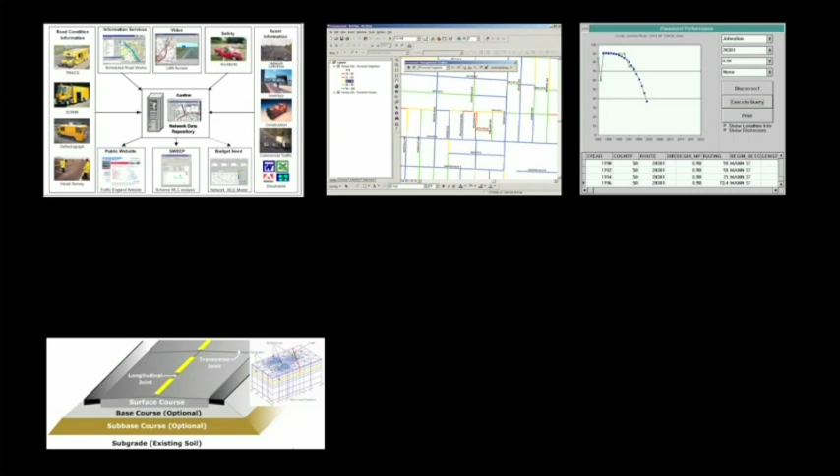So I think the future basically requires reinstating those systems. They're fairly simple things these days. Originally, in the old days of big mainframe computers, it was a major exercise, but with PCs on the desk, and even the cell phone in your pocket, you can probably run one of these systems now. So I think there's going to be an increase in those, which hopefully will allow better budgeting and more preventative maintenance, because without that preventative maintenance we're going to lose our road network over time.

As for the trucks, whether they stay or go, I don't know. There's a lot of people employed and a lot of money invested in the trucking industry, so I can't see it just changing overnight. But until the railways become more effective, that's not going to happen. If one could send goods cheaper by rail, then it would look after itself.